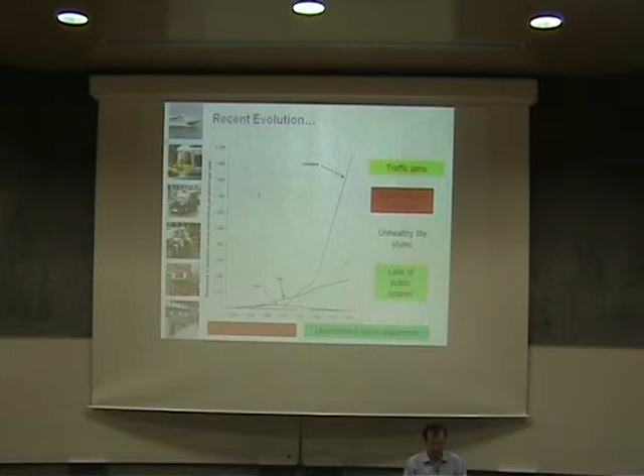Let's start with some of these lines and how they move, and let's see the latest tendencies in terms of movement and how people do their travel. So let's start with the ocean. I understood some of you went to the sea already, and as you can see here, the number of people that travel by ocean is steadily going down. It has a peak here around 1900, but not very peaking, and now it's going a bit down.

So here, with the light blue, we have the air transportation. Air transportation, of course, was non-existent in 1850, and it started to take off around here, 1950, after the Second World War, and now air transportation is clearly on the rise.

As for the rail transportation, it started earlier than the air, and it has a steady rise, almost like a straight line. It's this black line right here. This green line started in 1910, 1920, and it also has a nice rise, not so linear as the rail, but it also is increasing.

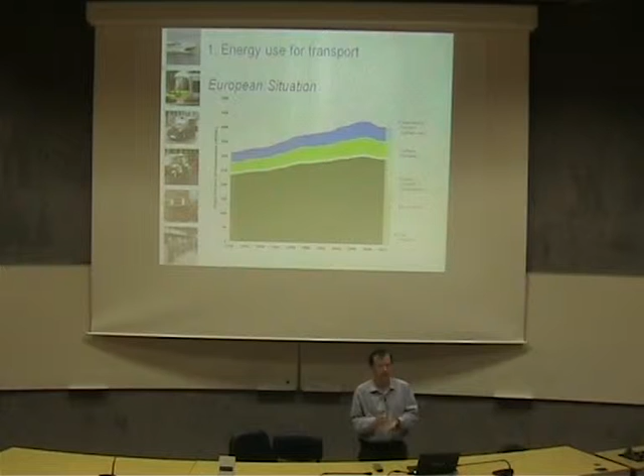In the transport sector, we can see here in this graphic the general use of energy and its evolution. The biggest chunk, the biggest portion, is this green one, and this green is road transportation. As you can see, from 1990 to roughly 2010, it's steadily increasing. Of course, it has a peak here that coincided with the economic problems. Now it's slowed a bit, but if you consider from 1990 to about 2008, 2009, it's almost a linear increase. And it's the biggest one, as I told you.

This one is aviation, the yellow one. So it also has increased. And this one is the navigation, maritime situation.

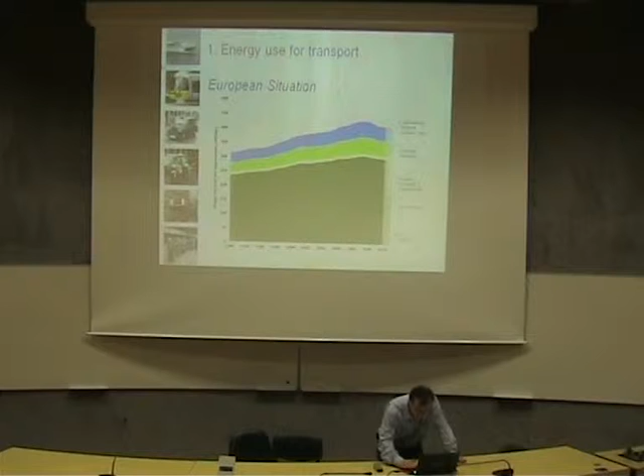So let's talk a bit about the greenhouse effect now. Let's go to the second point of it. I suppose you already heard a lot about this, so I'm not going to go into too much detail. It's not necessary. Probably you know more about this than I do, so I won't go into great detail. But a sustainable transport system should limit the emission within the planet's capacity to absorb it. Of course, this is a very nice phrase, but the question is, what is the capacity of the Earth to absorb emission? That's a more controversial aspect, but let's leave it aside.

What we can take into the future is that we have to limit our greenhouse gas emissions in all sectors. And since the transportation sector is a very important sector in terms of these types of emission, we have to try to limit them as much as possible.

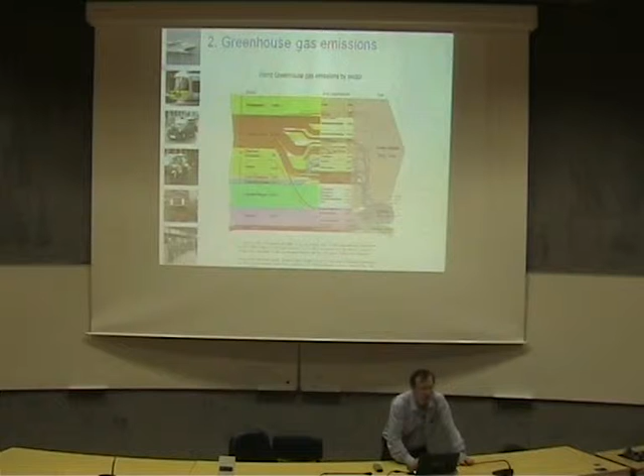So we have CO2, carbon dioxide, that's roughly 77%, and the contribution from transportation is 13.3%. So it's quite a big contribution. In the transportation sector, road is by far the biggest contributor, with almost 10%. Then we have the other gases, and we also have the other industries: electricity, heat, land use, agriculture, waste. The other gases are methane, CH4, and nitrous oxide, N2O or NxO. It's about 8%, but the biggest one by far is CO2.

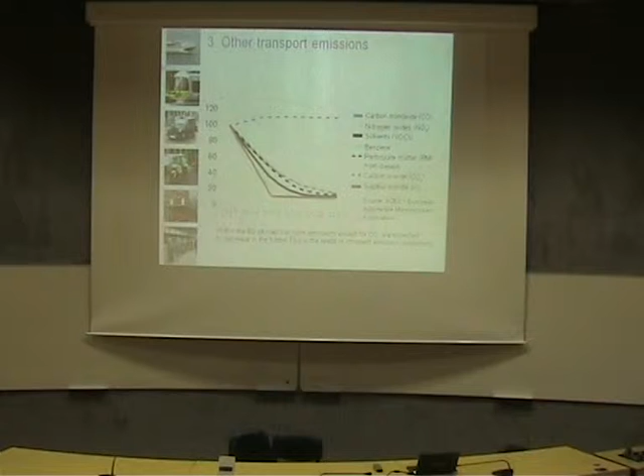Well, this situation has improved quite a bit, mainly due to the new technologies that vehicles have nowadays. So nowadays vehicles have extremely clean combustion, good anti-pollution mechanisms, so this situation improved.

Of course, the car has to be in shape, and the engine has to be hot. When the engine is cold, the anti-pollution mechanisms don't work that well. So this is important data: a car pollutes almost the same in the first kilometer as in the next 20 or 30 kilometers, because if the anti-pollution mechanism is not at the correct temperature, it just doesn't work. It doesn't trap these pollutants—it dumps them into the atmosphere.

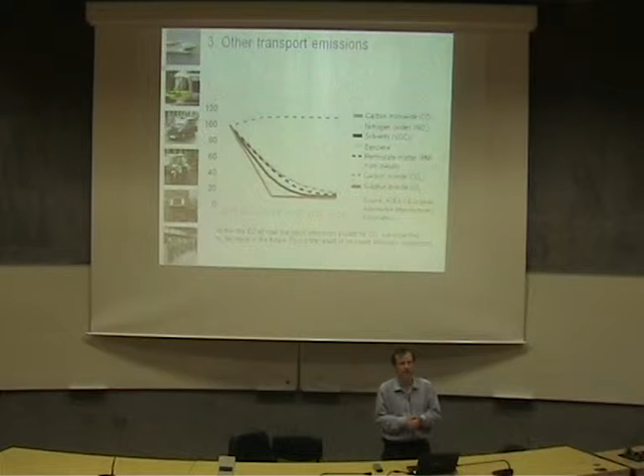Okay, now injuries and fatalities. Well, I could make about 50 slides of this if I wanted, but I guess there's no need for that. Everybody knows this: if you have road transportation, rail transportation, bus transportation, this kind of activity, you have a risk. And if you have a risk, unfortunately sometimes things don't go right, and you have injuries and fatalities.

Of course, the situation has improved, particularly here in Europe and also in the United States, because the roads are better, because the cars are much safer. But nevertheless we have some casualties, so if we travel less, we should have fewer casualties.

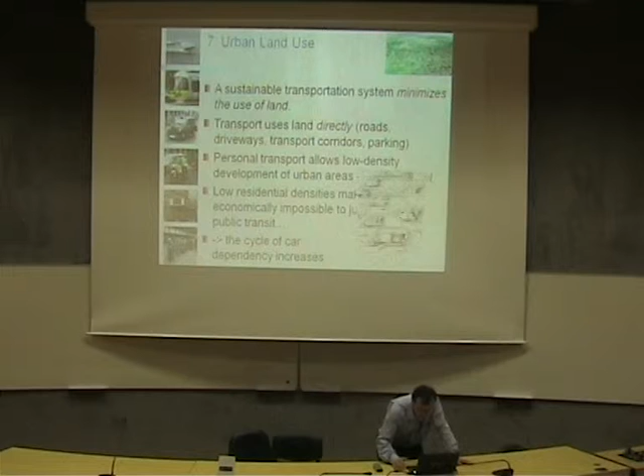Therefore, the cycle of car dependency increases with this kind of land occupation. So a more concentrated, more compact use of land is better for the environment.

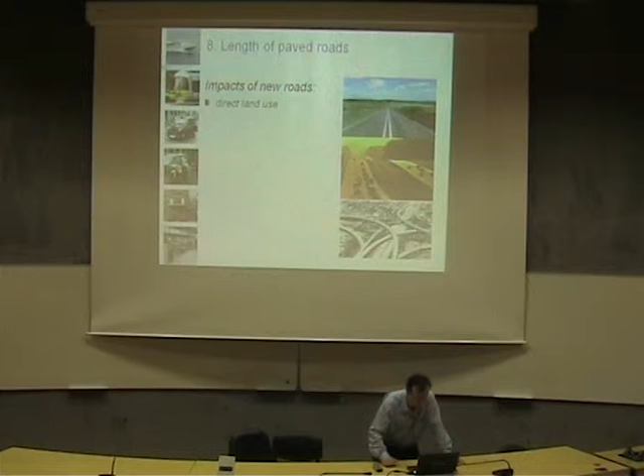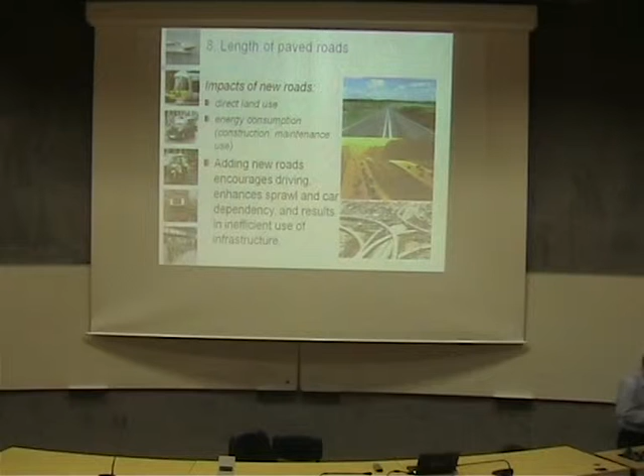What about the length of paved roads? Well, the basic conclusion in all studies is that the more lengthy the roads are, the more pollution you have. Because if you build more roads, you have more opportunities to travel, so people travel and use energy, and of course they pollute the environment.

I guess this is, of course, a Canadian situation—they have a very big country and very low land use. The situation in Europe is not very similar, not the same, but nevertheless it shows similar tendencies.

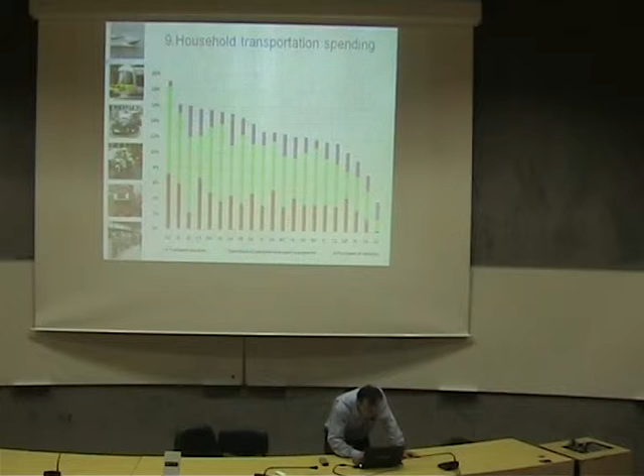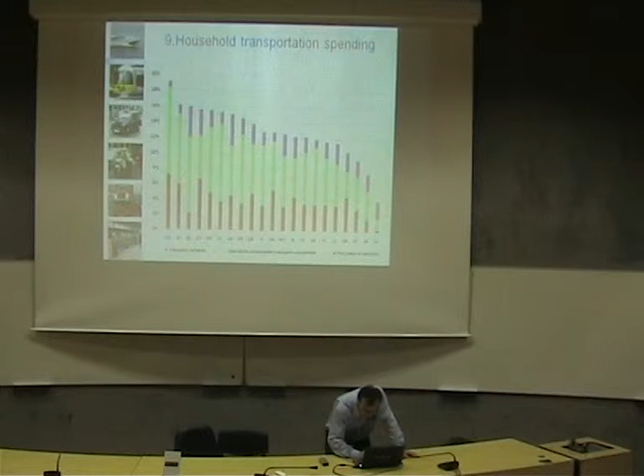Here you can see that countries like Hungary and the UK have very high expenditure on vehicles. Countries like Poland and Greece spend less on their vehicles.

But this takes us to the equity situation. If transportation is very cheap, lots of people use it and try to use it, we get traffic jams, and then nobody can use it because the roads are all too full. But if it's too expensive, the socially less privileged classes can't use it, so that's not good either. We have to strike the right balance and have equity in its use.

Let's talk about one of the main reasons people prefer to drive their private car rather than take the bus or the train or another public transportation system. It's because when they do their mental analysis, they take everything out of the equation except the cost of the fuel. Let me explain in other words.

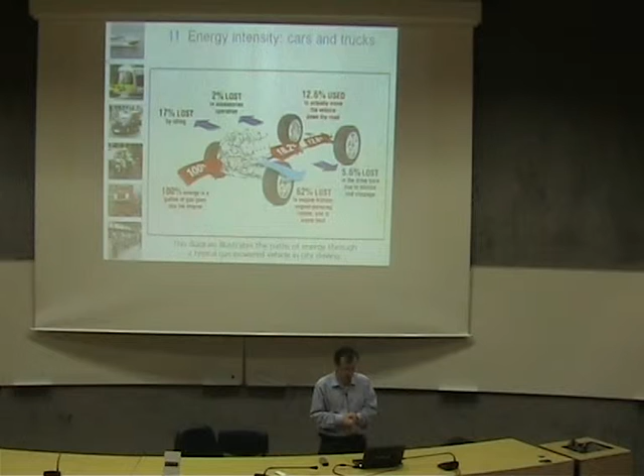Cars and trucks account for almost 75% of all transport energy use. To put this in perspective and in numbers, the energy that's in 1 liter of gasoline, most of it is wasted. I don't know if you have this knowledge, but this diagram is very good to show you how much of this energy is wasted.

So here we have 100%, representing the total amount. Of that 100%, 17% is lost in idling - you stopped waiting for it to go and you lose almost 17%. 62%, that's a big number, is lost in the engine by heat. The engine heats up, so that's energy that's lost. That energy is not used to move the vehicle, it's just heat wasted for nothing.

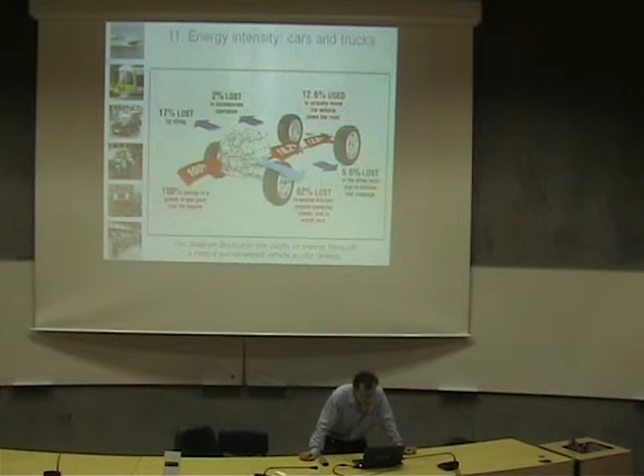2% is lost in accessories and operations - when we turn on the lights, the ventilator, the air conditioning, we lose a bit more energy. Then the transmission, the gearbox, the differentials lose another 5.6%. So what percentage is actually used? 12.6% of it. You put in 1 liter of gasoline and only 1 deciliter is used - the rest is totally lost.

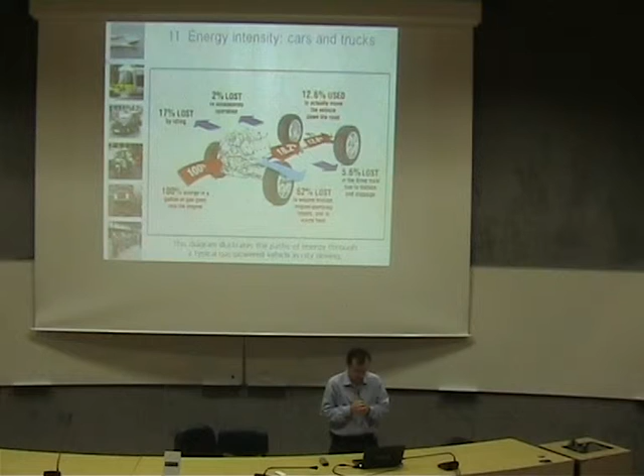This is quite an interesting view for you to see how much energy we waste in transportation and in private vehicles. So, what kind of vehicle is the perfect one? I guess you know because you just need to view it.

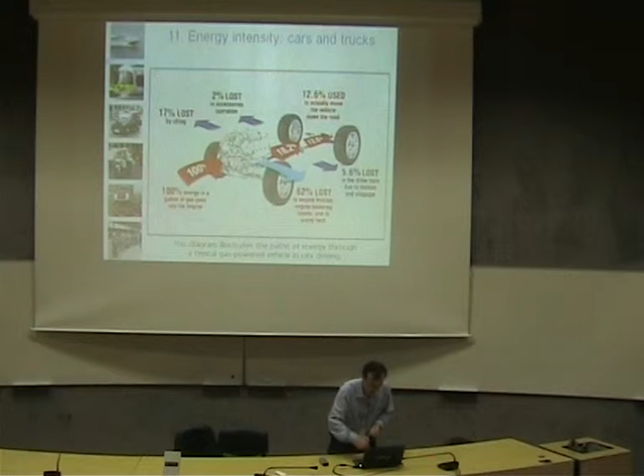Of course, I'm joking. Well, let's go to some practical applications of this.

So if you walk with your bicycle, at least in short trips, it's very much more transport efficient.

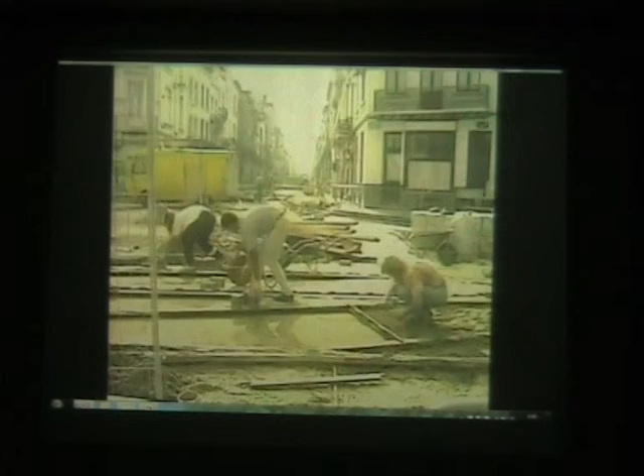As far as urban transport is concerned, in addition to the financing of equipment and infrastructures, particularly in the new member states, the European Union is backing projects that aim to replace petrol with clean alternatives.

Take the example of Lille in northern France. The city has something of a reputation as a pioneer in the field of sustainable and more efficient transport. It was the first in the world to build a totally automatic high-frequency light railway system. Today, this system carries almost 80 million passengers a year.

For the past 10 years, the urban community of Lille has been working on yet another new solution: the biogas bus.

Biogas is made from organic waste and sludge of sewage treatment plants. It's produced naturally, using naturally produced gas that is then purified for use as fuel for buses. The purification process is an innovation that makes it possible to convert the biogas produced by fermentation of organic waste to obtain the same level of quality as natural gas.

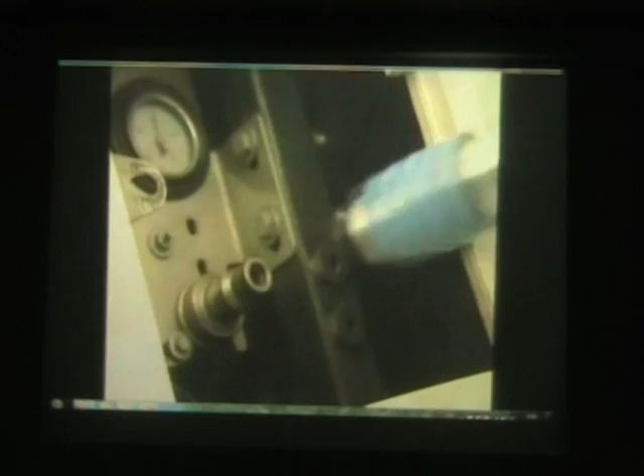Once the development phase was over, the city's projects gathered momentum with the acquisition of new gas-operated buses and the construction of an adapted bus depot. Each parking space is equipped with a recharging socket. When they return to the depot after their round, it only takes a minute for the drivers to plug their vehicle into the automatic distribution network.

At present, we have just over 200 gas-operated buses, 214 to be exact, from a total fleet of 330 - therefore around two-thirds. The aim is to make the entire fleet run on gas and to only have gas-operated vehicles. And so as not to waste this great idea only on the buses, the city now has plans to make its dustbin lorries run on gas.

Let's now head for Graz in Austria. Next time you're passing through, don't forget to taste the local speciality, the schnitzel, with a generous offering of chips. You may not be aware of it, but you'll be doing...

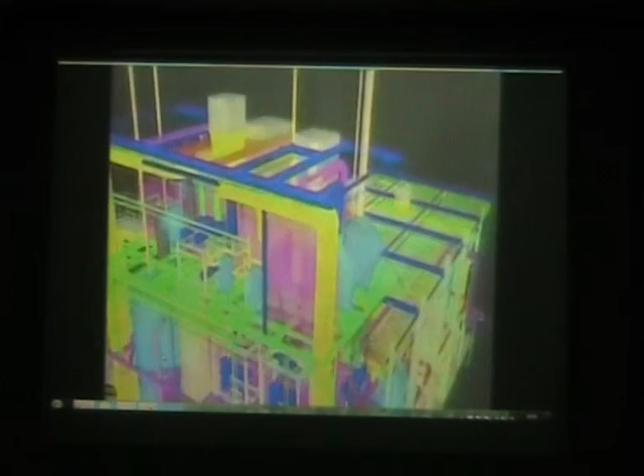Another good piece of news: the equivalent of biodiesel exists for petrol. This is bioethanol, produced using plants that Europeans grow in large quantities, such as sugar beet or wheat. The European directive has given a serious boost to the use of these biofuels. In Graz, for example, one taxi company runs its 200 cars exclusively on biodiesel.

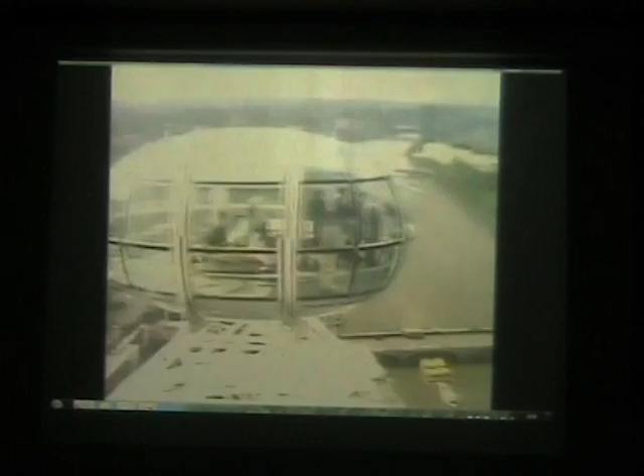This takes us to the third stop on our travels: London. The British capital is one of the most polluted cities in Europe. One of the culprits: heavy vehicle traffic.

Here again, the solution could come in part from the famous red buses, or at least from this bus in particular. At present, only 3 of them actually run in the city. At first glance, they don't appear to be any different to the others. But if you take a closer look around the back, what you could mistake for exhaust fumes is nothing more than a plume of water steam.

London is one of the European cities testing the hydrogen bus in its network within the framework of the European Research Programme.